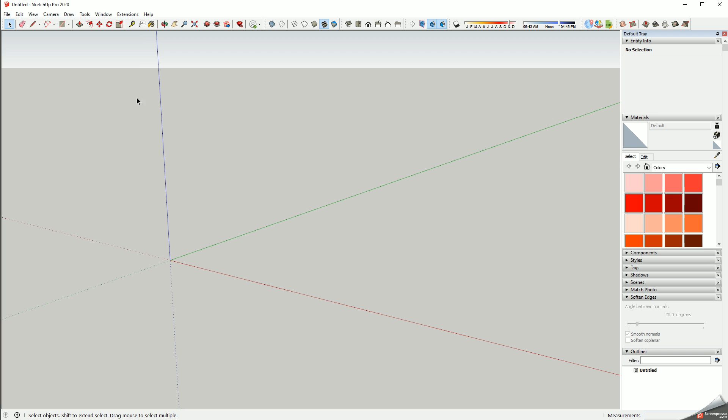Hey guys, a couple of you have been asking how to add a building to the topography imported from SketchUp in a very accurate way. There is no easy way to do this in Revit, but there's one additional step you can do in SketchUp that will make it easier to locate your building on a topography.

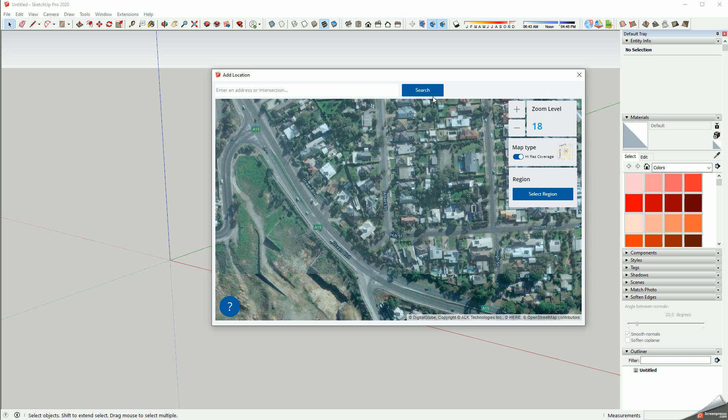So the easiest way is, let's just add a location from SketchUp like we did before. We can pick any area, let's say something like this. I will select that region, select Nearmap, and let's go to DigitalGlobe. Actually, Nearmap requires you to have registration.

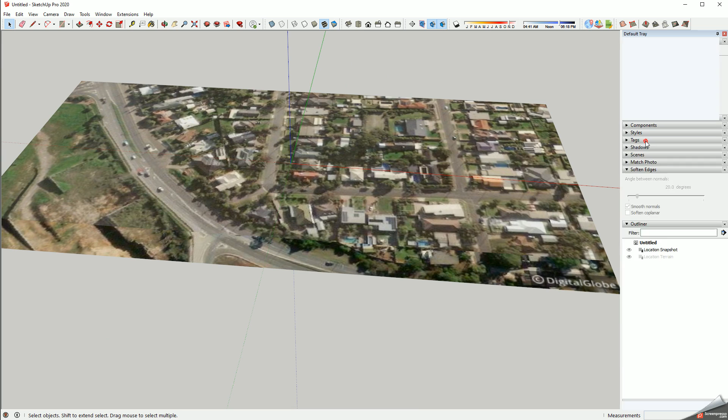So here we go, and like we had before, we'll find the tags. The tags are the layers, and we can turn off the snapshot and turn on the actual terrain. So there you go, our terrain here. It's a little bit all over the place, which is nice.

Let's say your building is this one here, right? So what we need to do is, under tags, create a new one and say building outline, or a site outline. So we can say, okay, this is my building.

In SketchUp, when these things turn purple, that means they're perpendicular to one another. So you just need to make sure the first line you draw is fairly accurate, and then the rest can sort of follow fairly easily. So I'm just going to do this and extend this, and then erase these two lines.

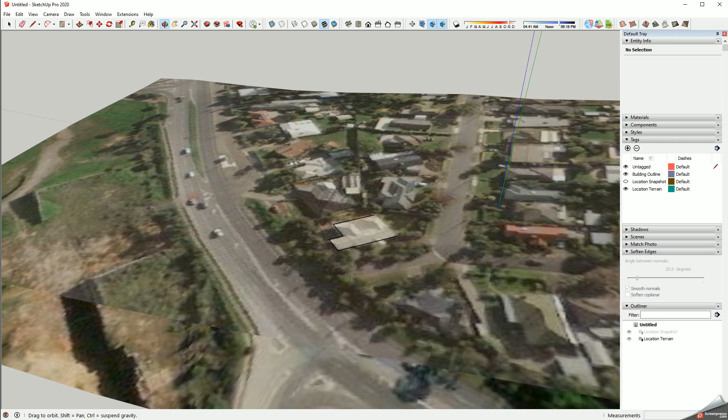There we go. Now, because we've done this on a terrain, what we get is uneven line work, all over the place. So what we need to do is go back up here, turn off the terrain, leave the snapshot on because that's 2D and everything is flat. Then we go to the line and draw it from there.

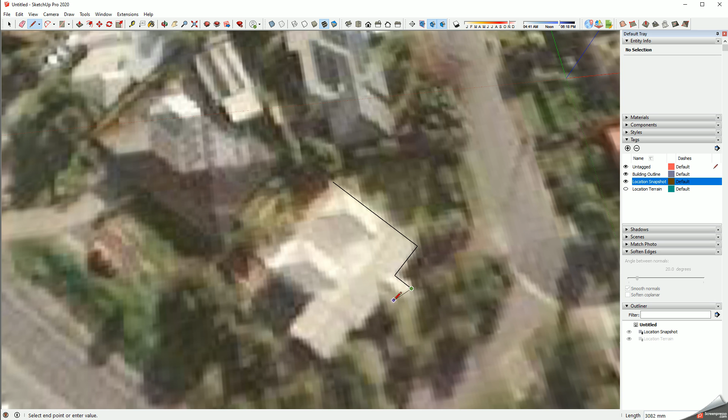So we do one of these, perpendicular, something like this, whatever the building shape is. For this, I just select that and we can trace it over into here. If it doesn't work, just overdo it like this. Go back to this one, draw and intersect, and then use erase or E to delete this and leave that as that.

And basically with this in mind, we can then do the same. If I go, let's say site outline. So you can select all of this work we've done so far, and you can see that under the tag, under entity info, it still says untagged.

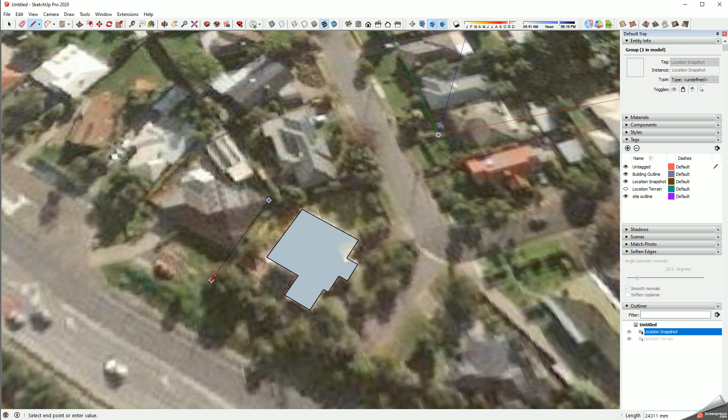So we just need to make sure this is selected and placed on the building outline. And then the new one, let's say this is the site itself. So we can just imagine it's something like this.

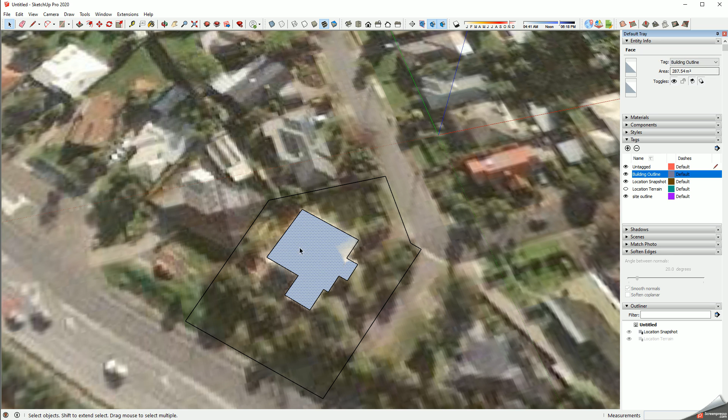So in this case, I'm going to delete the surface and just leave the line work. And the line work is going to be site outline. There we go. So that means if I turn on the site outline layer or tag, it's there, and the building outline, all of that. I'm going to delete the surface as well, or we can just change the surface to be the building outline as well. But in this case, I think it's not really necessary. We'll just leave this.

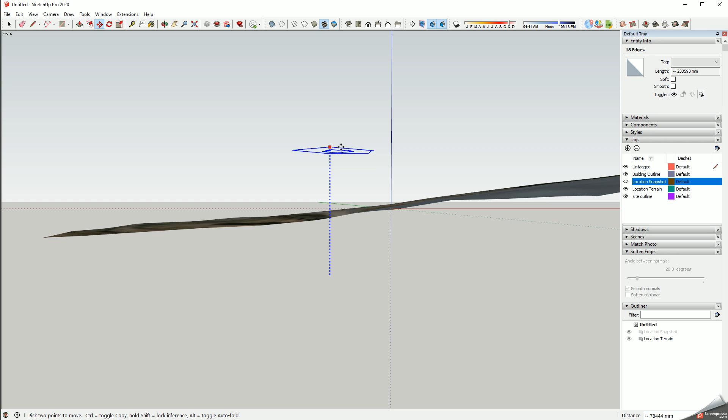And basically then we turn back the terrain and we can turn off the snapshot flatness. And there you go. If your lines are below the ground, let's say if your lines were here somewhere, just select them and make sure you find the blue line and press shift. That will lock it into the Z axis and you can shift it upwards until it's up in the air. You can position it where you want manually like this, or just make sure it's higher up, makes no difference because that location can be adjusted in Revit afterwards.

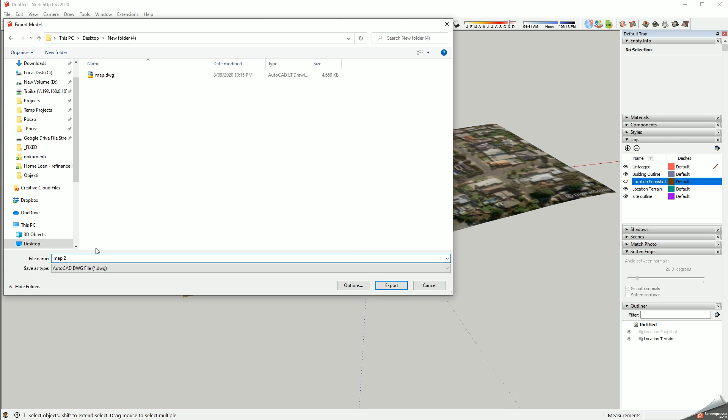And then we go to file, export or save as a 3D model, and we'll go to desktop, and we'll just save that as map number 2, very original. There you go, AutoCAD is done.

So then we go back to our previous model. Let's say we go back to the site. Make sure you save often. I'm saying no to save because this is just a tutorial, but you should definitely save it very often. All right, so we go back to Insert tab. We go to Link CAD.

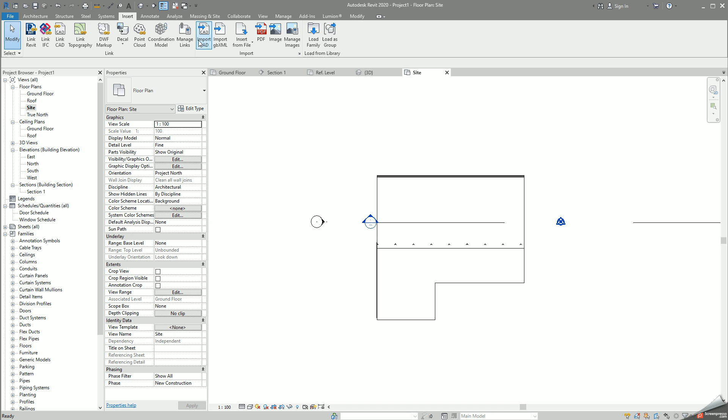In this case, I'll go import. We'll go back to my desktop folder. Where was I? Here we go, map number 2.

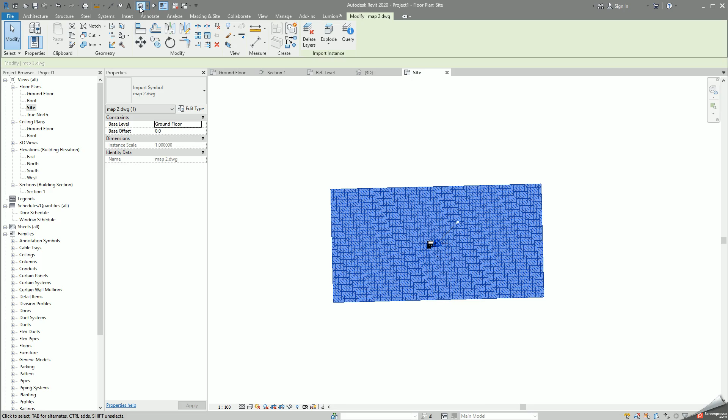Turn off correct lines and we insert this. And like we had before, that's our topography. You can now see that this is where our building is, and this is where the site is. Even though we don't have any textures, because of the actual topography itself, we can do this fairly easily.

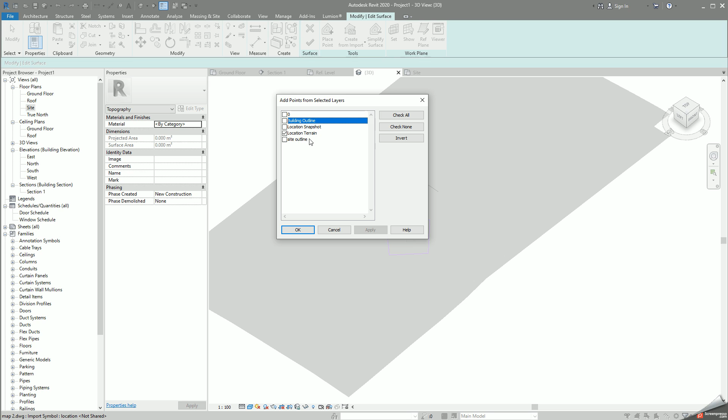So now, if you remember from last few times, we go to Topo Surface, create from import, and select import instance, select our CAD file. Now with these, we only select the terrain, deselect all of these other ones. So you can see that there's now building outline and the site outline we created. We don't really need that, we just need the terrain itself. And then we go okay, okay. And this is our terrain.

And now going back to the site, we can position our building into there, or just draw the building in that location if you haven't done it previously. So when you're drawing this, you will see that it's starting from the center line, and that's because the location line is set to center line.

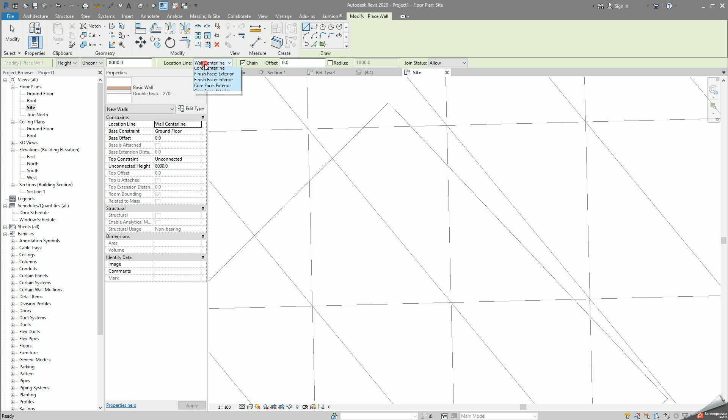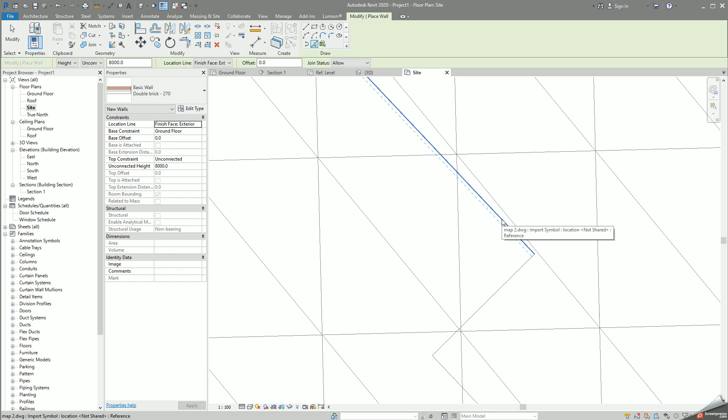If we select this to be a finish face exterior, it will be exactly on that side. So then we can do this manually, or we can go pick a line, select all of these, and tab to change select. By moving your cursor to the opposite side of that line, you can actually specify where the wall is going to go. In this case, I want the wall to go inside like this, and I click on there once, and there we go. Our walls are exactly on that line there.

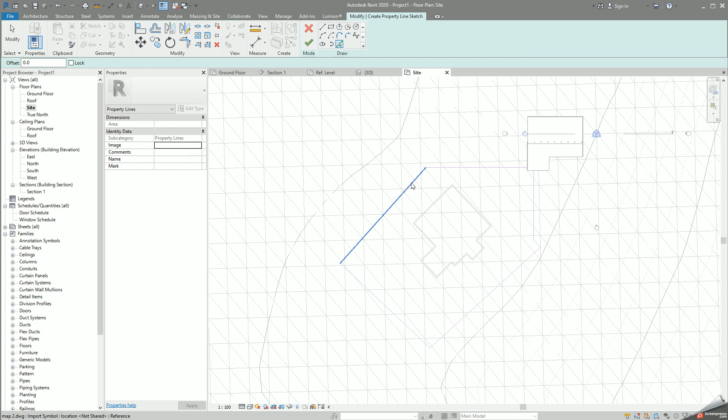And then for the boundary, the easiest way to find the boundary and make it stick in these different views is to use it properly, which means you go back to massing and site, and then there's the property line in there. So property line, go create by sketching, and again we go to pick a line tab, and then you get this sort of dashed line.

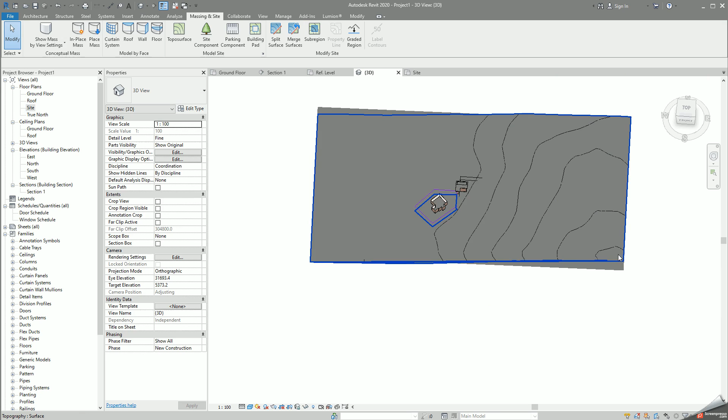And now for this, you can select sub-region. Again, you can select this like so. So that will allow us to have this as a different color as well. So after you do all of this, you can just go and select the CAD file and either hide it or temporarily delete it. I'm just going to hide it for now, makes no difference really.

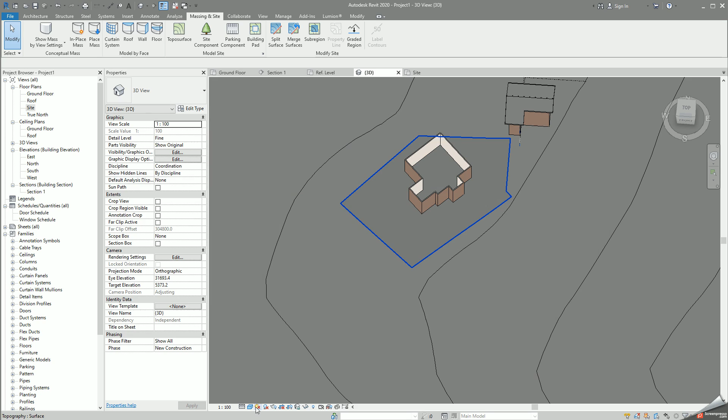We select that area there. We can select this and say this is going to be a site. Let's say I'm just going to pick a random element there. Okay, and consistent or realistic colors, and there we go. Now we have our normal topography, and then we have our specific site map there with our building there.

I'm just going to recreate the roof. So there's this little option, if you already have an element, whether that's a door, window, a wall, or a roof, if you click on this one here, it will create a similar object of that same type. So rather than me going to architecture and clicking on the roof, because I'm being lazy, I can just select this existing roof and click on create similar.

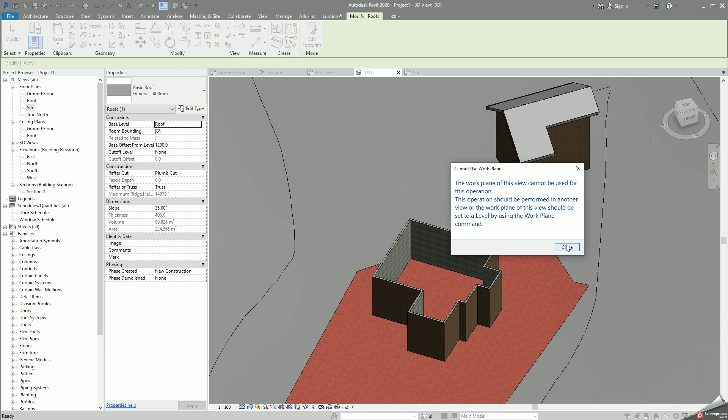Okay, so it's giving me an error. It doesn't always work, because of what we've done last time in the other tutorial sessions it stuffs up that recreation. But if you selected your wall, you could go create similar, and you can actually then draw another wall. So we'll have to go the manual way for the roof.

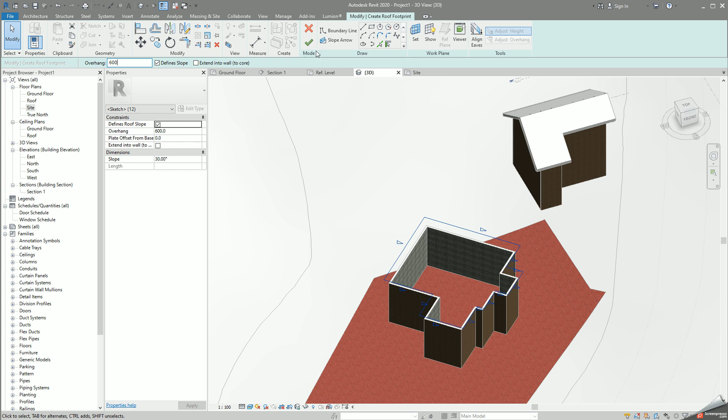So we will need to set our work plane to be a normal level, so just a roof level there. And now, of course, when we select our roof, it will actually be able to do it. We click on pick walls, we select all of these walls, it's there. I'm going to select all of them. I'm going to say, just for kicks and giggles, 600 overhang. And here we go.

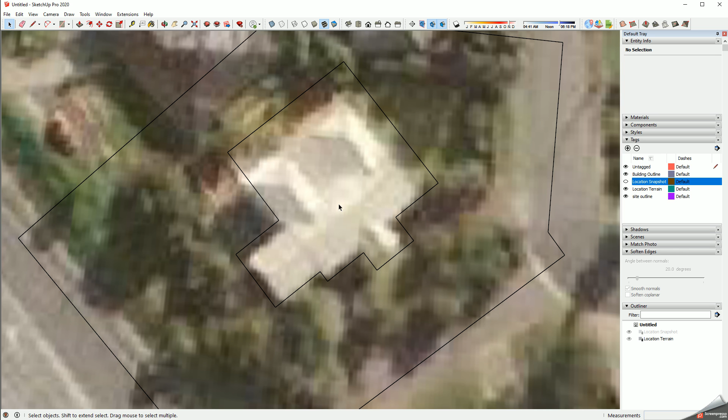How does this compare to our SketchUp? Well, probably not very well, because the roof is quite different. I think there's two gable roofs, as you can see there's two triangles there and there. So that can be done when you sort of probably go into Street View, you can sort of see it a little bit better.

Or of course, you'll have much better, clearer imagery so you can actually see what's happening and you can do it accordingly. So for example, if you were going to do that, you would create something like this with a small gap, let's say 10 mil.

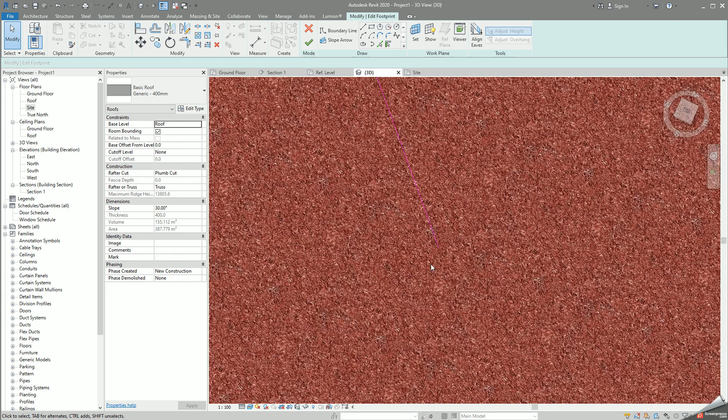So we go there, we go 10 mil, and then we push it back to this side here. I'm just going to go consistent colors so we can actually see a little bit better what we are doing.

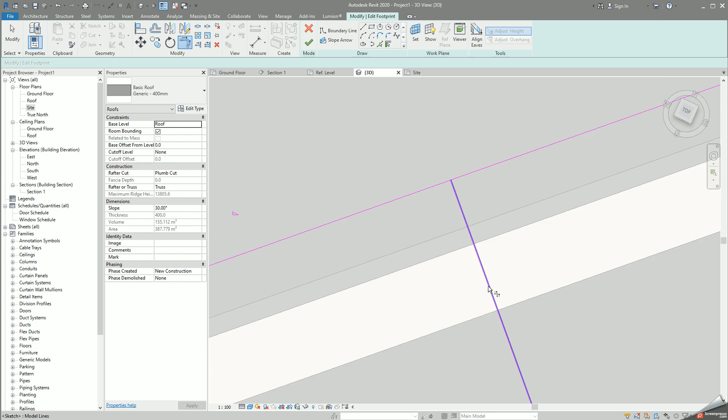So we split this line. Basically what we're trying to do is create two separate roofs that are looking quite similar. We want to make sure this line here should be undefined, and we want to make sure that this line and this line are all angled, which is true. So now when I do this, you can't do it.

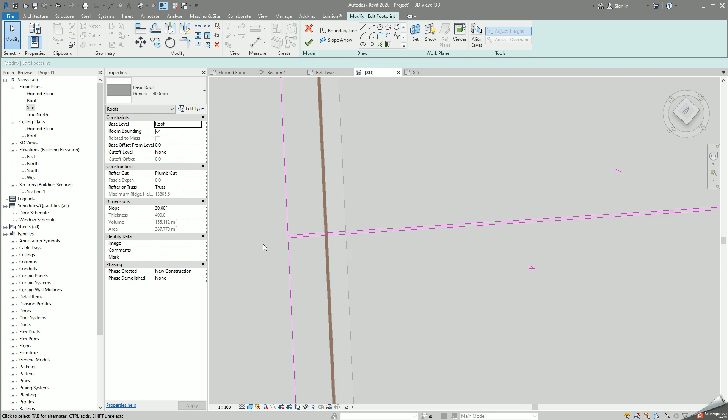Why? We will see that in a second. The reason being, sometimes this needs to be slightly increased to make it work. And if it doesn't work again, most likely some of these other ones are causing the issue, so we'll need to play with these and turn them on and off until it works.

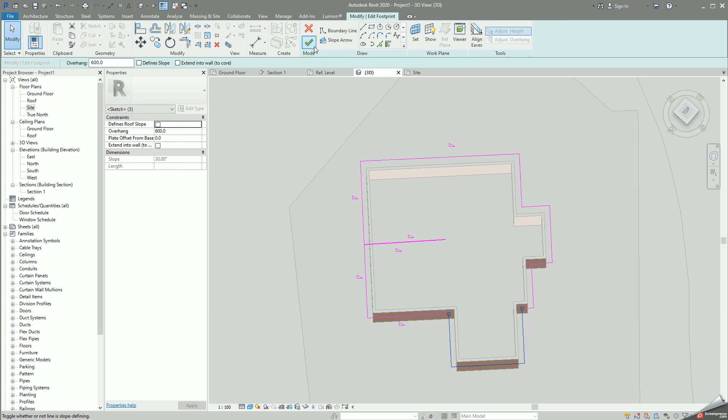Okay, let's see this. So this is trial and error. Clearly, you have to do this if you have a very complex roof.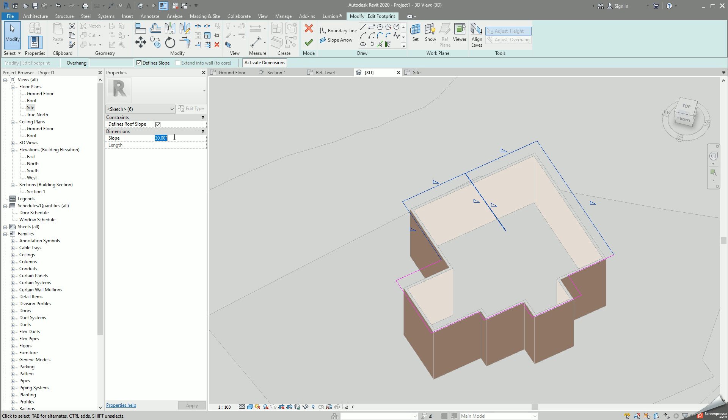So that's not what we want. We want... okay, so it could be that the actual slope is far too great. So I'm just going to go 15 degrees. Yeah, it doesn't want to cooperate.

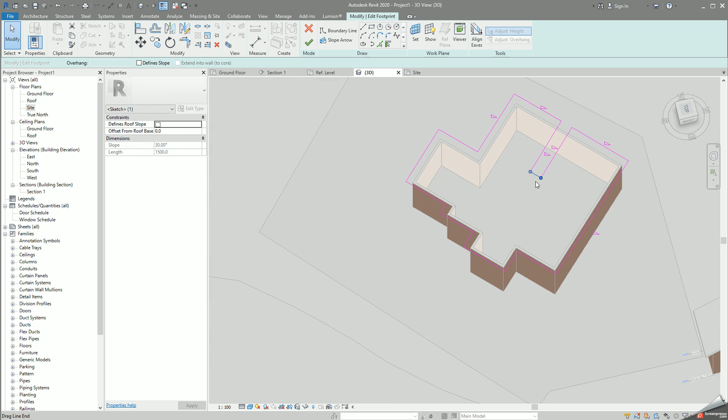So I'm just going to increase this to a much larger area, and we'll probably have to split this into several different slopes. I'm just trying to be quick and lazy.

All right, fine. So if you happen to run into this problem, don't just cancel and delete the whole roof because we already started on it. Copy it: select all the lines, do Control C, and then cancel it.

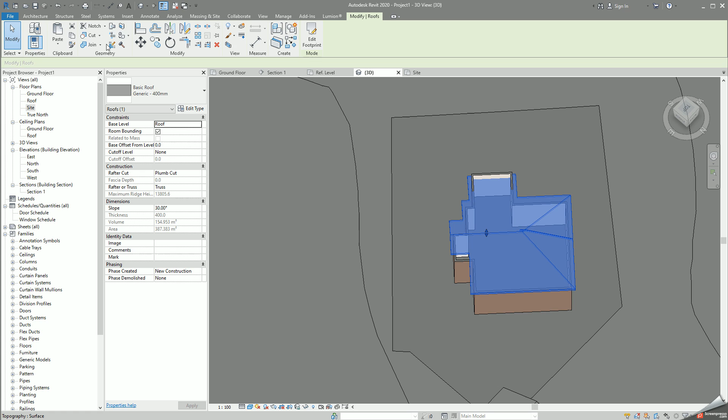Leave it as it was, and then just literally do copy and paste of this one as well. So copy and then align to same place. That will actually give you two different ones.

So you can double click on this one and just ensure you are doing this, okay? Make sure you sort of split up your roof into smaller segments that actually make sense. So we can do it something like this.

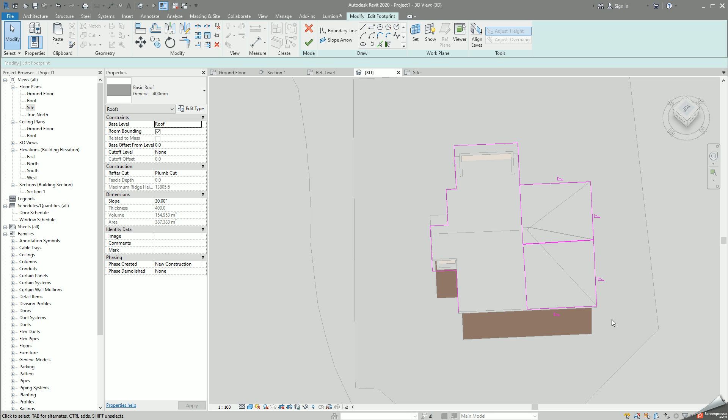Now you can't have two separate roofs, so you have to do one by one. So we can delete it like this.

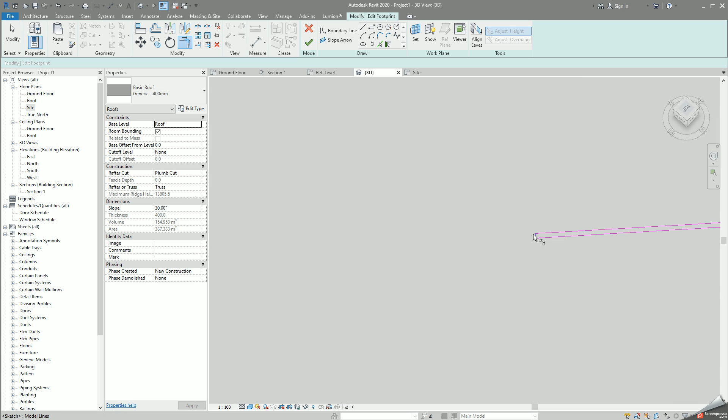You can do this, and then for this one here, we can modify - and I'll go, of course this is the old one - so we just need to sort of again select the other side like so, and select all the others and delete them.

So we have that, and then we can align to same place and copy that roof again, and we can then start modifying the other bits and bobs. So let's say something like this, and then this can be removed.

What happened there? So select this one, select this one, and I'll select this one to be a defined slope.

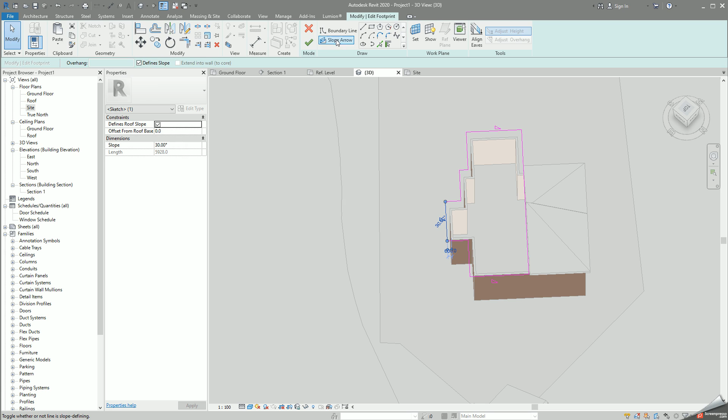Okay, so you get this - it's telling you that these lines cannot intersect, and they're usually selected orange, right? So you just have to go continue, and then most likely we have a duplicate line.

Oh, there you go, see that little sucker there? So you have two lines by mistake. You just need to start selecting like this until you can actually find the line in question and delete that guy. And there you go.

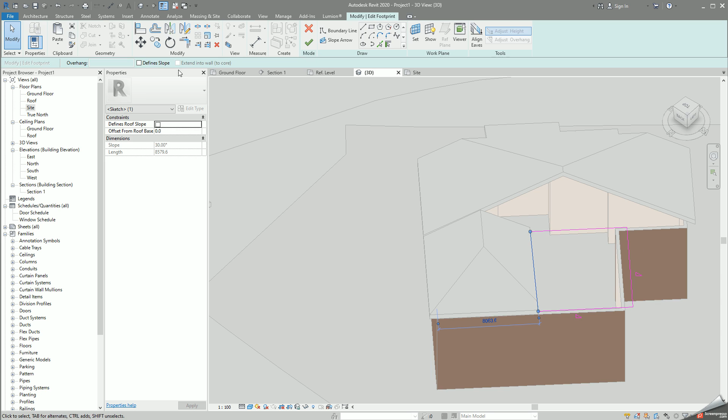So then for this one here, I just want to define a slope in this direction as well, like so. You can define the direction in this line like so. And then you can start modifying these other ones to suit.

In this case, I don't even know what this one is. So this is just a normal gable roof going into the side. You can see that this is the triangle there, continuing all the way up to there. So okay, let's try and do that.

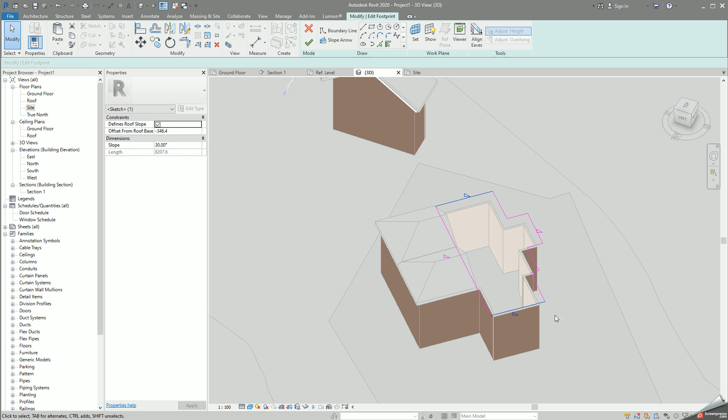So we can select all of this and select this line to be a defines slope, and then these lines should be open. So something like this.

Except clearly that is not 30, so maybe let's say it's 15 - but clearly it can't be 15. You know why? Because these roofs need to connect into... let me just delete the other building in the background so it doesn't confuse you guys.

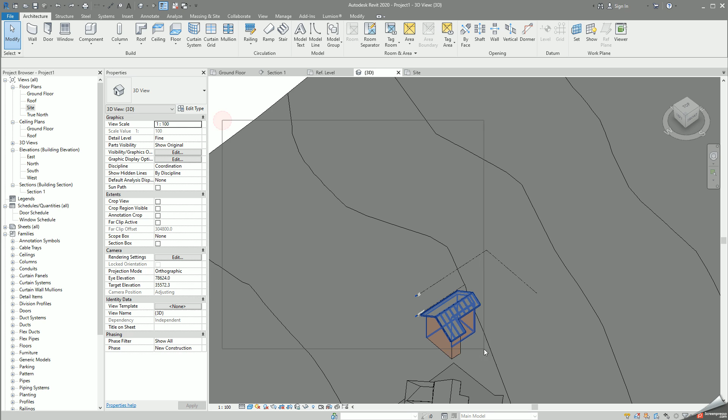Oops, there we go, delete us.

So now with this, if I go into the side view, you can see that these roofs are actually higher, taller than the other one, which means they can't actually connect into it. So that means either these need to be lowered, so these need to be 15 degrees or something, and then we get something like this.

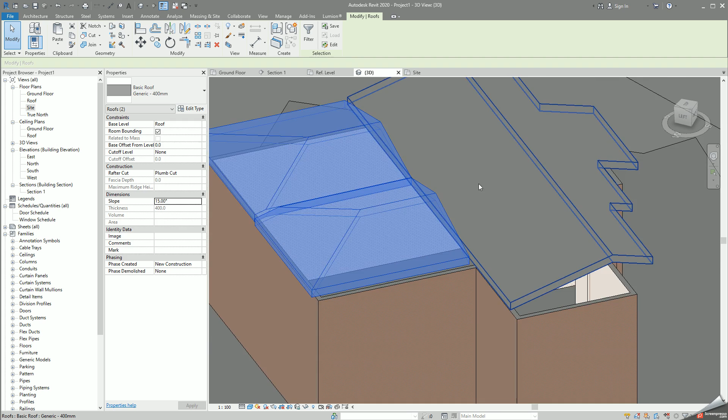Now we have this interesting little function. First of all, clearly this roof here is taller than the others, so if you need to adjust it due to the actual heights, you can. So you can lower this one to be there.

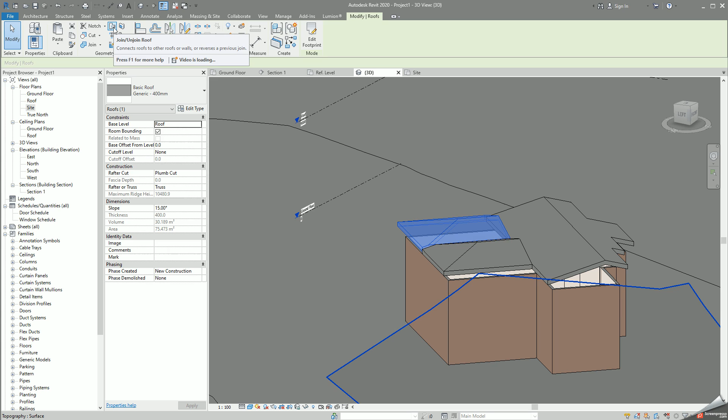Then basically here, if we select one of these, there's this join/unjoin roof. In this case, it will ask you to select an edge, and then it will ask you to select a surface. And if I do this, it gives me this. So to replicate this again, we select any one of these surfaces, then the edge, then the surface, and we get this.

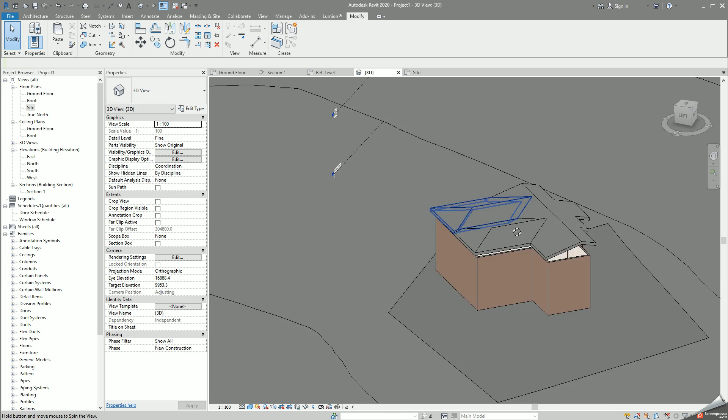You can see that this one is actually cut into it, cutting around that surface of that larger roof. And there you go, you get your roof, which is what you were hoping to get here. This part here has another small bit, exactly the same as these - they connect into the main roof, but basically that's the gist of it.

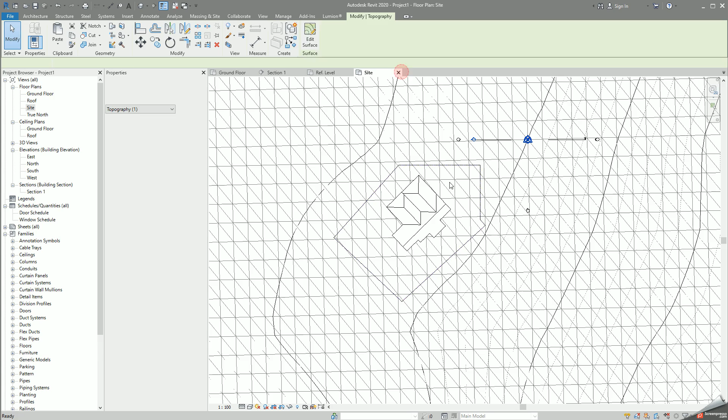And that's how you do the topography. If you want to modify the topography itself, like I said, if you double click on it... let's hide that. So if I go back to here, you can select edit surface.

Sometimes if you double click, it doesn't work, you have to go edit surface. It really depends on your Revit installation and some of the graphical settings, but don't worry about that - there's always a few different ways to do it.

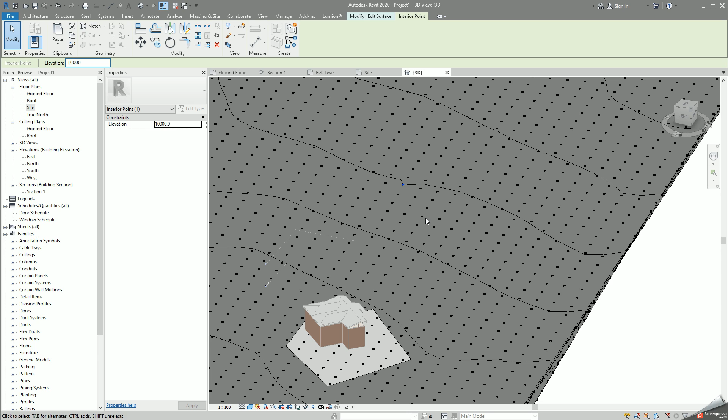So good old Revit is here. We can now start modifying these points individually, like I mentioned before, to whatever you think is correct. This is very slow and tedious, so hopefully you can do it differently than this.

One of the easiest ways to do it in Revit - in SketchUp, sorry - is by using modify vertices, but we can cover that in a later stage.

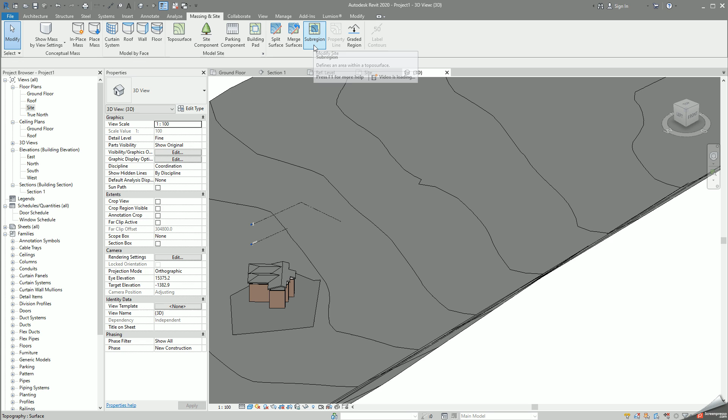In this one here, I always recommend you go in and do the building pad if you need a flatness area. If you need more of a road element or to draw stuff on, I would suggest you use a sub-region, just like we did for the site.

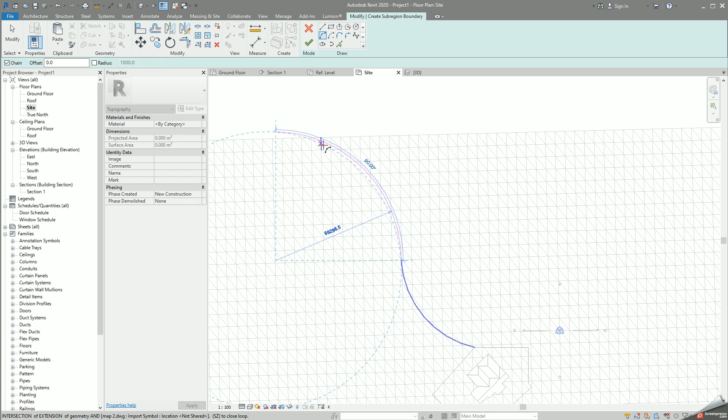You can then go and further complicate your topography by being silly and creating your roads. So in this case, I'm just going to do something like this.

I'm going to go offset, select my offset to be, let's say, 6 meters, and select it like so. Then just select these. If you can't select it or intersect it, click tab a few times until you can actually snap onto it like this.

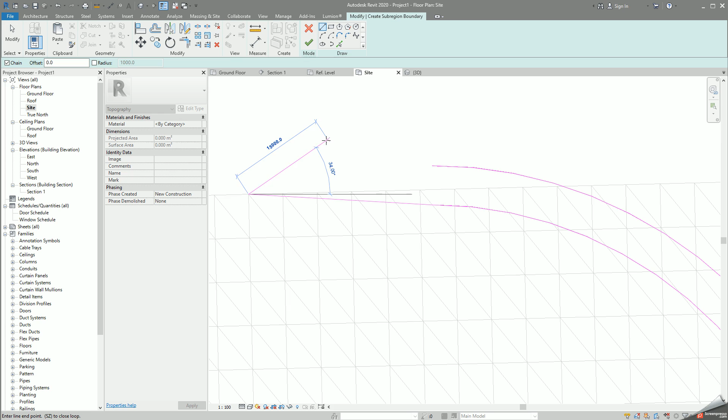And that surface there can be done something like this. Again, because this is outside of the topography, it makes no difference what you draw - it just needs to close off. And this, I'm just going to trim, TR for trim. You get something like this, all right?

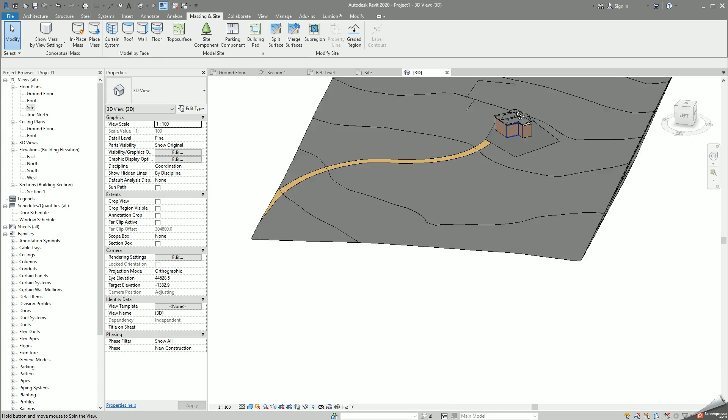And that one can be a different material. I'm going to choose oak flooring because why not. And there you go - a nice little topography that can be adjusted to suit by doing a section through the building like we discussed earlier.

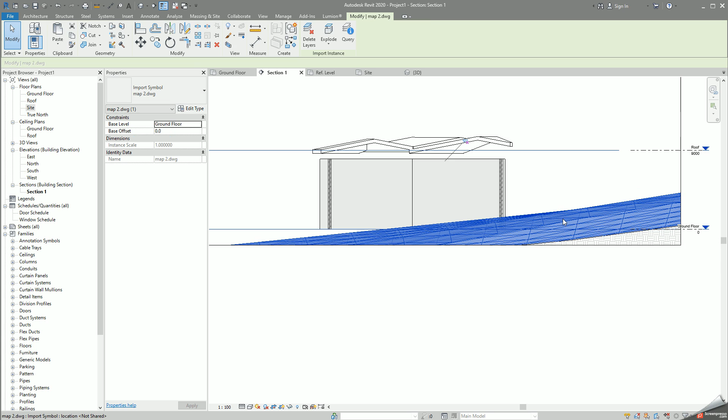So I'm just going to draw this one here and change the extent, go into that section. Here we go. So that's your CAD file - just hide that one and then you can see where the topography actually is.

You can switch to thick lines here so you can see that cutting line a little bit more, and then select that topography as a whole. Move it up and down until you are happy.

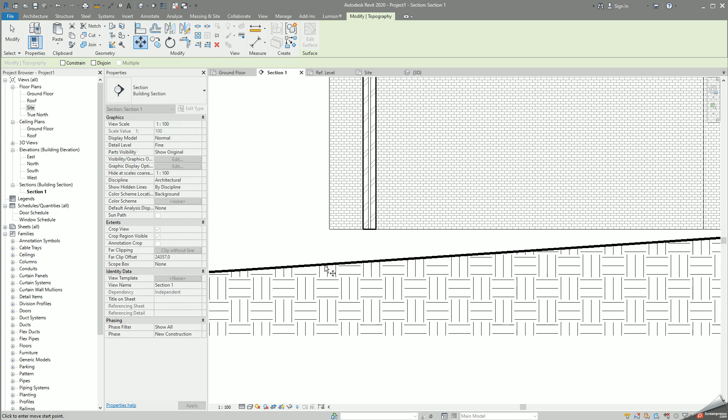So let's say this is where our ground floor is going to be, or you always pick the worst case scenario - in this case something like this - and that needs to be aligned. And then you do the building pad as shown earlier, and there you go.

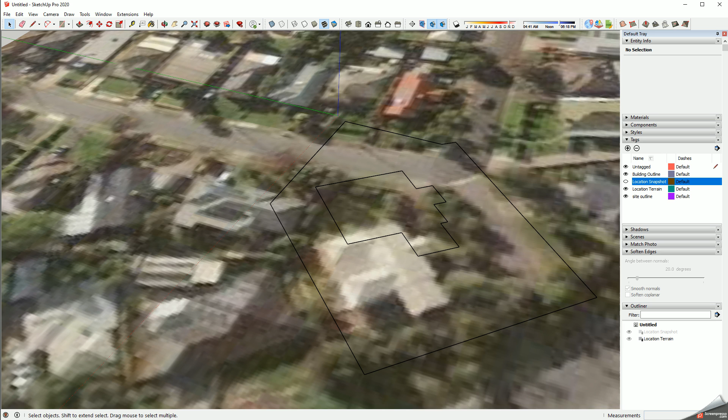That's your beautiful little building and topography, situated in a proper location based on your SketchUp import.